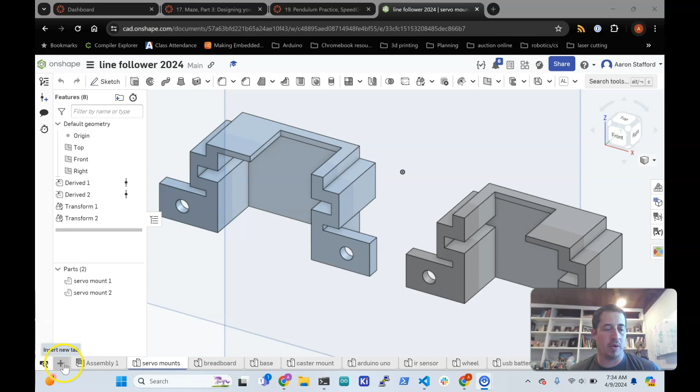Okay, so working on building mounts for those infrared sensors. We're gonna open up our line follower document and create a new part studio. Okay, and we're gonna rename it IR sensor mount. Then what we'll do from here is import some parts.

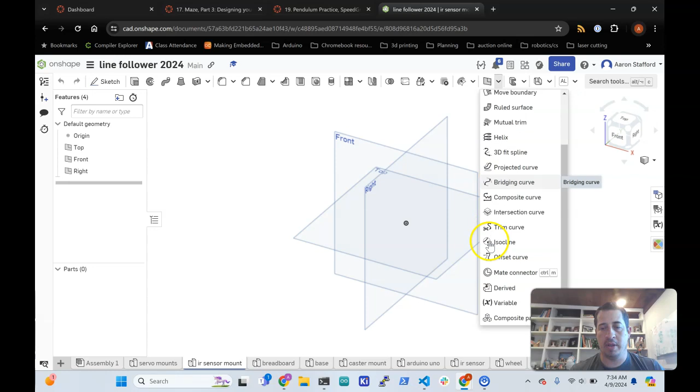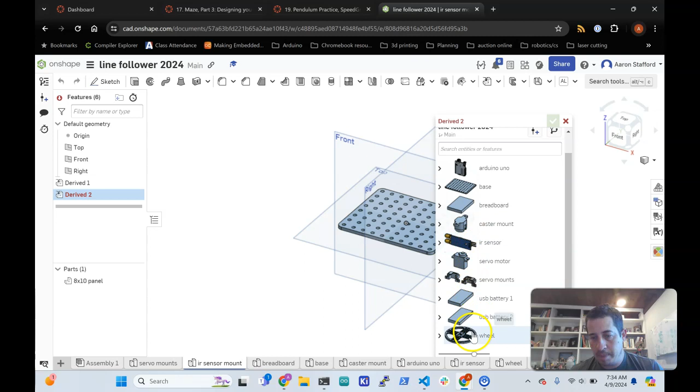So we'll import using this derive tool, and we're going to bring in our base, and we get the base right there. Then we're going to import as well, and if you want to bring in two of them you can, we'll just bring in one for now. Let's see, the infrared sensor.

And so now we got those imported, and we'll do some transforms. So we're going to transform this to get it where we want it. So we're going to rotate.

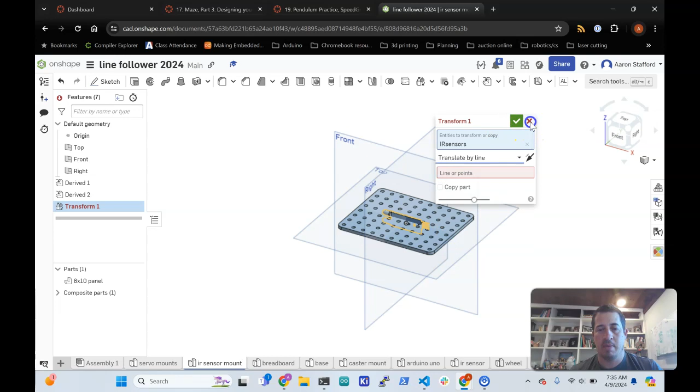Might be worth drawing an axis on here. So let's make a sketch on the top plane. And we're going to make a line here, just running top to bottom like that. And we're going to make another one going like this.

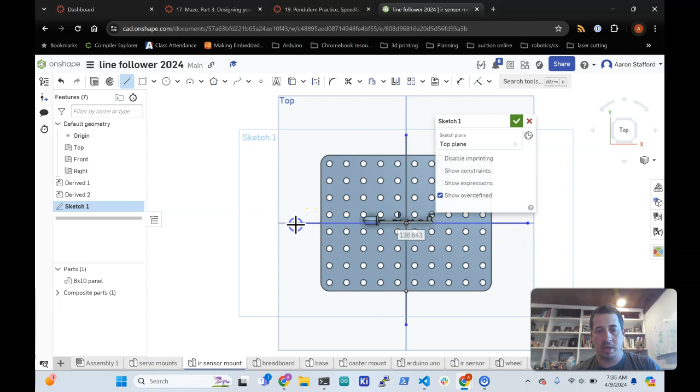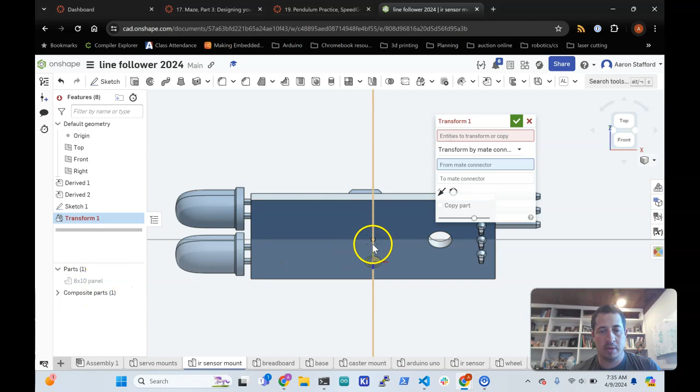Okay, actually, instead of doing a rotate, what we'll do is this. We got those lines if we need it, but so we're going to do transform by mate connector, and we'll put a from right in the middle of this bottom face, like that. And then we're going to put it to - we'll put a mate connector on this front edge, right like there. And then our entity that we transform will be that sensor.

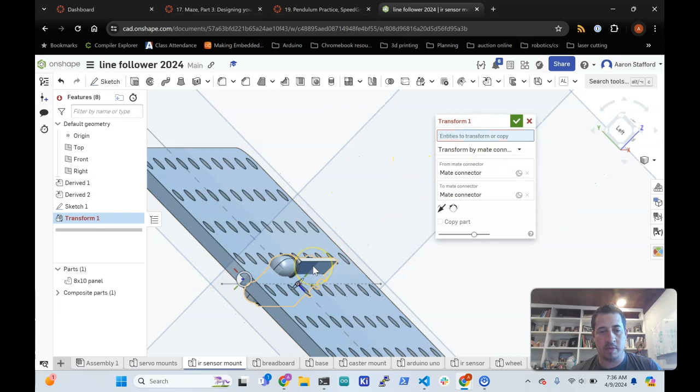Okay, and that's going to move it. And now we can, depending on how yours came out, we want to flip the axis and rotate it. There you go. So now we got our mount in place, or our sensor in place.

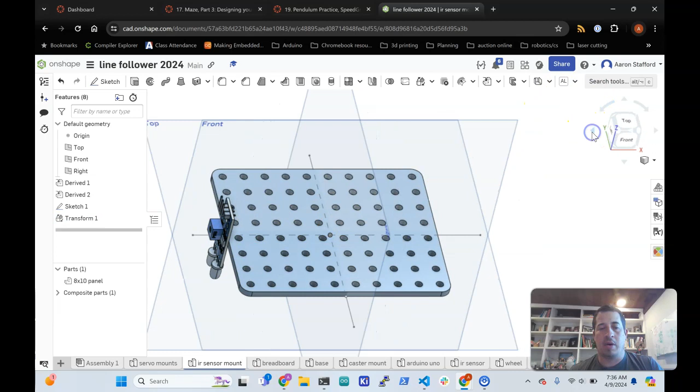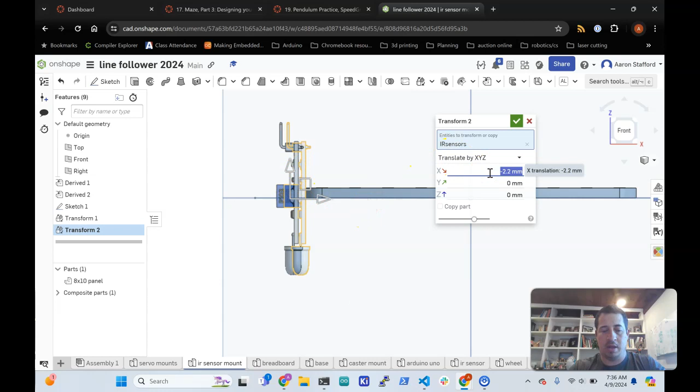Then we can maybe do one more transform of this object. Okay, and we're going to translate by XYZ. And so now you can kind of move it around so you can come out to the mount. Maybe say like 2. If you want to move it up or down, you can.

Okay, so we may want to also move this up in the Z direction here. So we can kind of slide it up this way. We'll set that to be like 4 millimeters. Okay, so looking at it from the side.

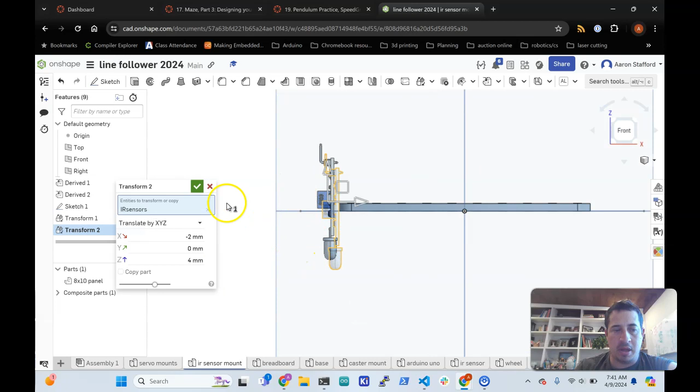And then we also want to move it right to the side of our robot, or our line bot here. And so we'll set this to about 25. You can adjust it for yours. This will get it centered on one of those openings.

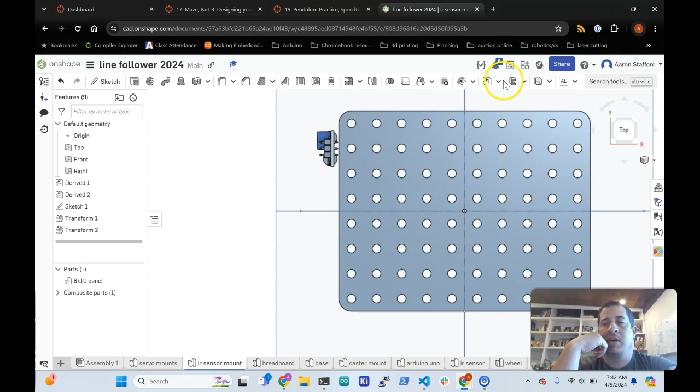And now we got that in place, and we can start using that as a reference and a tool to build it, and then we can go back and edit that transform if we want to adjust the positioning.

Okay, from here though, we can say make a sketch on this surface and draw a rectangle, maybe a line to the center of these. Let me line it up. And then, something like that.

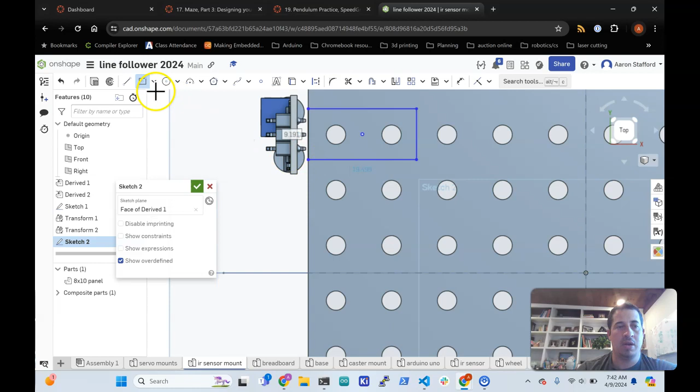We can extrude it. Maybe do a new extrude. We'll say it's maybe 2 millimeters thick. And then we could just go like that. We got something like that there.

And that could be like a way that we mount it to the surface here. And then you could do a vertical and attach that if you want. It's up to you. Just needs to be something you could print.

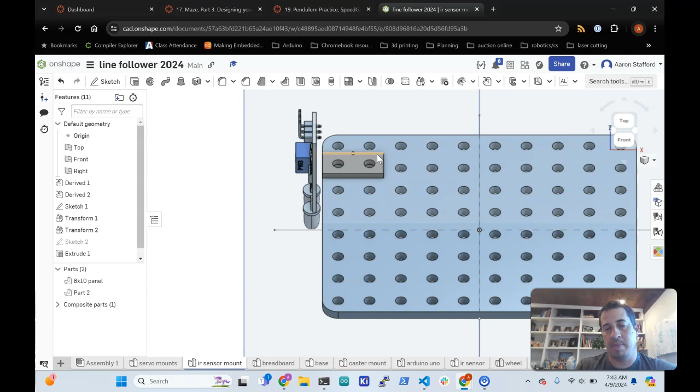As you're building it, you do need to make sure that you kind of sketch it out first and draw some ideas on paper before you turn it into a 3D part. And then the other thing is you want to do it relatively symmetric so you can use the same sensor on both sides, or the same mount for both sensors on either side.